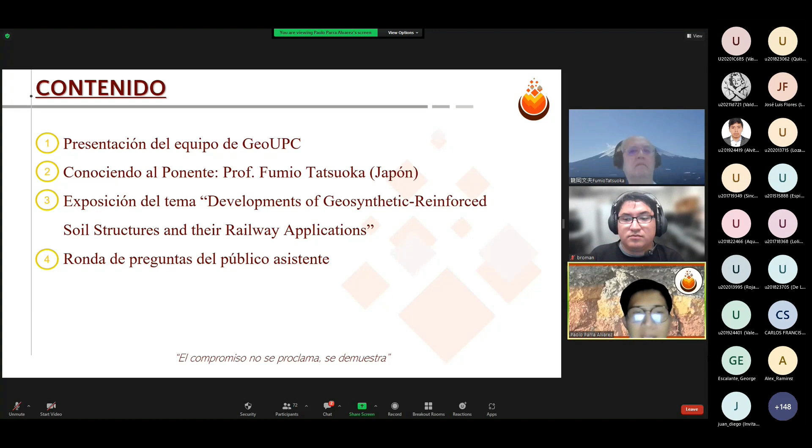Bueno, voy a presentarme un poco acerca de mi persona. Actualmente soy egresado y estoy trabajando para la empresa minera Cerro Verde como becario en el área de geotecnia en la gerencia de proyectos. En cuanto al equipo GeoUPC, somos un capítulo estudiantil conformado por alumnos de la carrera de Ingeniería Civil de la Universidad Ciencias Aplicadas, y tenemos como razón de ser nuestra formación como profesionales en el ámbito de la geotecnia.

Nosotros conformamos un espacio crítico de investigación donde participamos y creamos actividades para el aprendizaje de manera teórica a la práctica.

Bueno, voy a dar un poco acerca del profesor Fumio. El tema de hoy, como ya se le comentó, es acerca de la geotecnia sísmica, titulado Development of Geosynthetic-Reinforced Soil Structures and their Railway Applications. Es profesor emérito de la Ingeniería Geotécnica por el Departamento de Ingeniería Civil de la Universidad de Tokio, en Japón. Sus principales contribuciones en la investigación geotécnica incluyen la dinámica de suelos, ensayos en tensiones, deformaciones en laboratorio, el comportamiento de suelo-roca, la modelización constitutiva del suelo, los geosintéticos, las estructuras suelo reforzadas, numerosos artículos técnicos y monografías, entre los que se incluyen varios artículos sobre el estado de la técnica y sobre el tema clave.

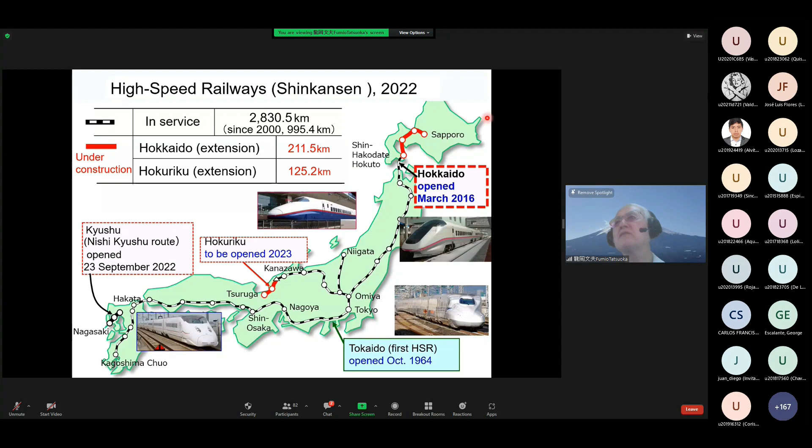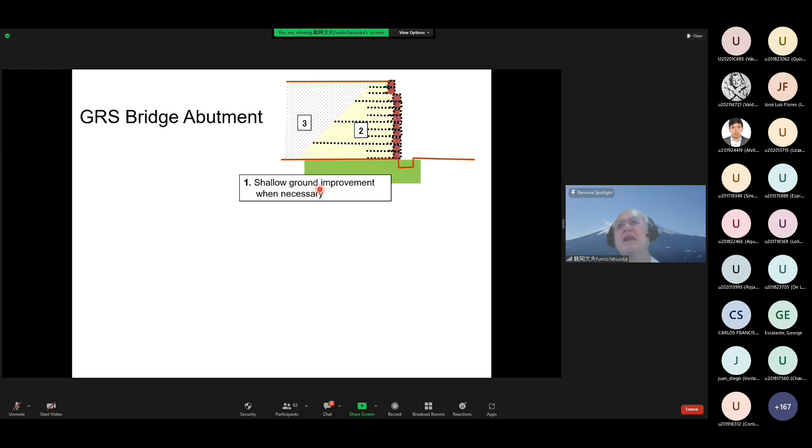First, shallow ground improvement when necessary, then construction of the GRS wall. So this is the view at this stage of the GRS bridge abutment, and then we construct the full height rigid facing, then the bridge bearings, then the girders.

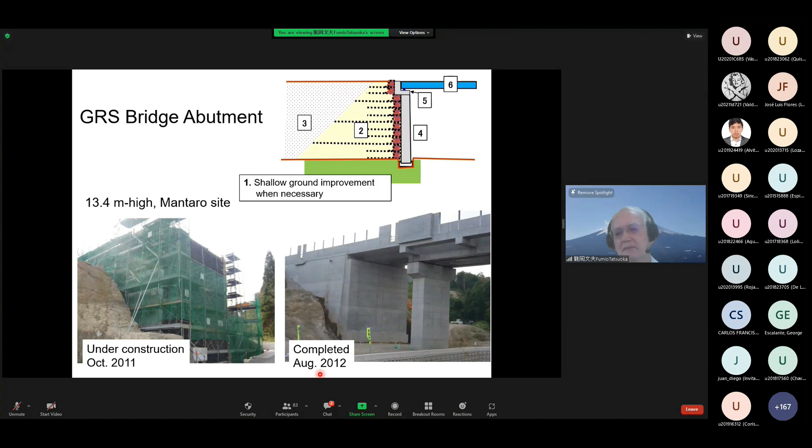Oh, this is the completed GRS bridge abutment. Here in Kyushu, this just opened. A number of GR structures were constructed. Among them, 78 GR bridge abutments were constructed.

This is the typical GR's retaining wall. Here, in this route of high-speed railway, 88 bridge abutments were constructed at the tunnel exit, like here and here. GR's bridge abutments were 78 - that is 87% of all the bridge abutments.

So this is how the GR's bridge abutment is constructed. One is bench cutting of stable natural slope. Second is construction of approach fill.

That is the geogrid-reinforced, well-compacted, lightly cement-mixed gravelly soil. The third is compaction of the backfill, at least 95% of max density at the optimal water content by modified Proctor. Fourth is arrangement of the geogrid layer.

Fifth is a completed approach fill. Sixth is a completed GR bridge abutment after construction of full height rigid facing.

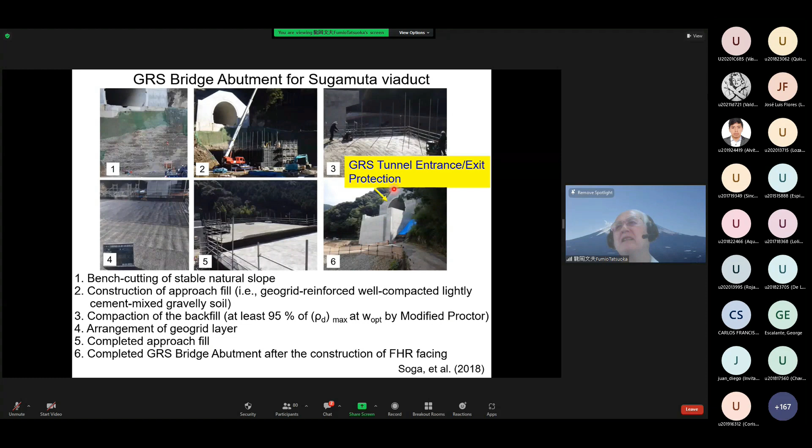Here is a GRS tunnel entrance exit protection. GR tunnel entrance exit protection has this structure, and this is the compaction of the backfill, then the arrangement of the geogrid layer, and this is the construction of GR's walls on both sides of the tunnel.

And this full height rigid facing is structurally separated from the RC tunnel lining. This is a typical GR tunnel entrance exit protection. Here you can see.

This is showing GRS integral bridge at the place called Genshu. So first, we excavate subsoil like this.

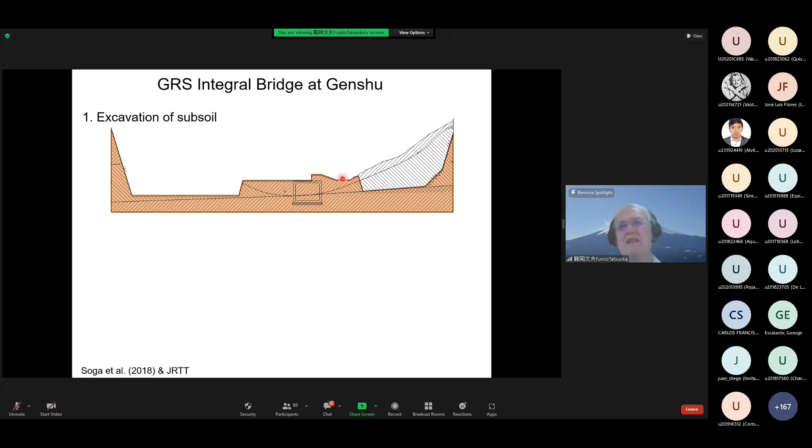Then construction of approach fills - this is the geogrid-reinforced, well-compacted, lightly cement-mixed gravelly soil.

Third is the construction of full height rigid facing after the deformation of the backfill and subsoil had taken place sufficiently. This is one of the key points of this technology.

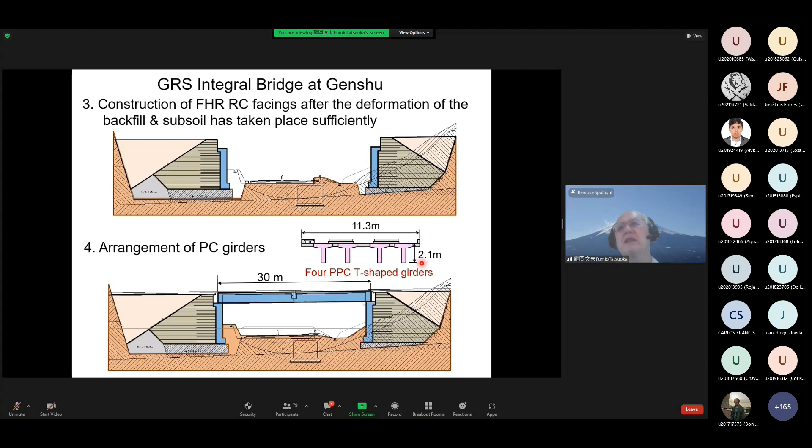Then fourth is the arrangement of PC girders like this. This is the cross-section of the girders. This is showing the placement and arrangement of a 30-meter long PC girder.

Then the structural integration of both ends of the girder to the full height facing, then construction of slab and others to complete the bridge like this.

This is a view taken in August this year. So here's a GRS bridge, integral bridge, and this is continuous RC slab tracks.

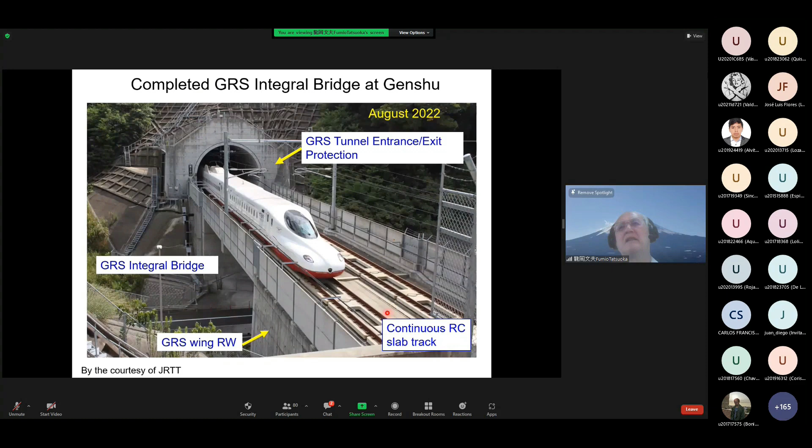So why are we using continuous RC slab tracks? The first thing is a relatively high initial construction cost, but a very large reduction of maintenance cost.

This continuous RC slab has not been constructed on conventional embankments and backfills retained by conventional type retaining walls, as it is difficult to ensure small settlement. On the other hand, construction of GRS structures has become standard practice, as small settlement with high stability can be ensured by good soil compaction, in addition to the use of synthetic reinforcement with small vertical spacing, 30 centimeters, firmly connected to the facing.

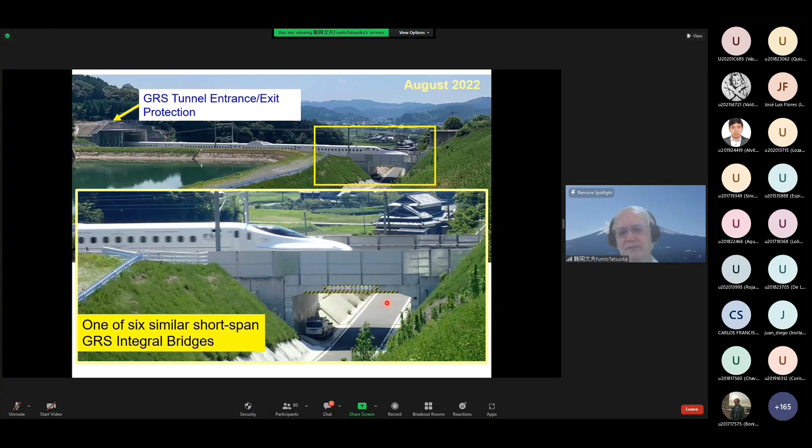So far, no problematic case during and after construction has been reported in all these projects. That is, no problematic case in all these projects.

The summary of the first part: a number of GRS structures with full height facing have been constructed in place of conventional type retaining walls, bridge abutments, and bridges. These GRS structures have become the standard railway soil structures in Japan.

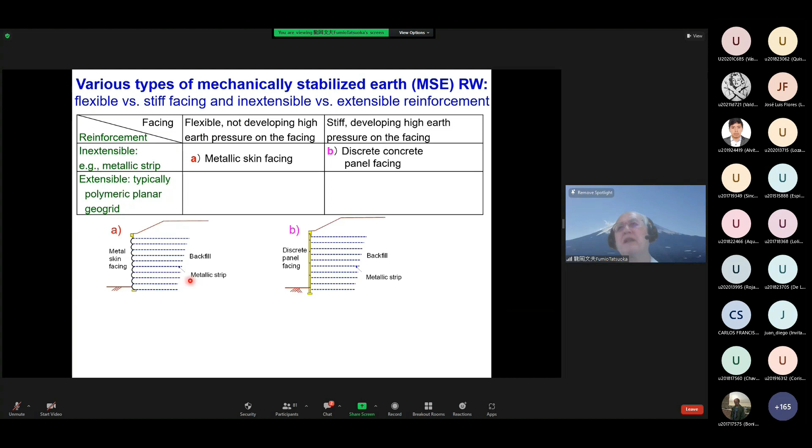So the combination of flexible facing and metallic strip is A. The combination of stiff facing and metallic strip is B. The combination of flexible facing and extensible reinforcement is C. And the combination of stiff facing and extensible reinforcement is D, modular block facing, and full height rigid facing, E.

Previously, many considered that facing is only to prevent the spilling out of backfill, and for small wall deformation and high wall stability, the earth pressure on the facing should be kept low. So flexible facing, for example A and C, is sufficient.

However, we have often observed that when using a flexible facing, for example A or C, the earth pressure is low, whereas the wall deformation is large, sometimes too large, indicating the paramount importance of using stiff facing.

So when the facing is flexible, we have a very low earth pressure on the facing. This results in low tensile forces in reinforcement, in particular at low level. This results in, in the active zone, low confining pressure, and therefore low strength and stiffness of the backfill. So we have large wall deformation and low stability of the wall.

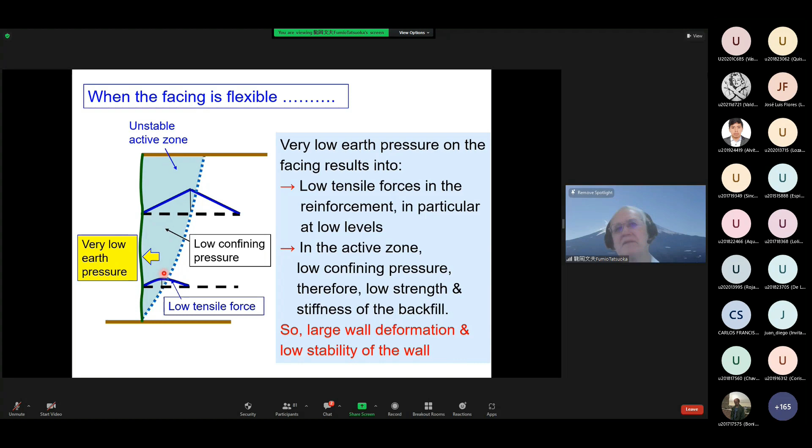On the other hand, we have consistently observed that stiff facing firmly connected to the reinforcement layers, for example B, D, E here, develops large earth pressure, which results in small wall deformation and high wall stability.

So when the stiff facing is firmly connected to the reinforcement, then we have high earth pressure on the facing. This results in high tensile forces in the reinforcement, even at low levels. Then in the active zone, high confinement pressure, and therefore we have high strength and stiffness of the backfill. So small wall deformation and high stability of the wall we can obtain.

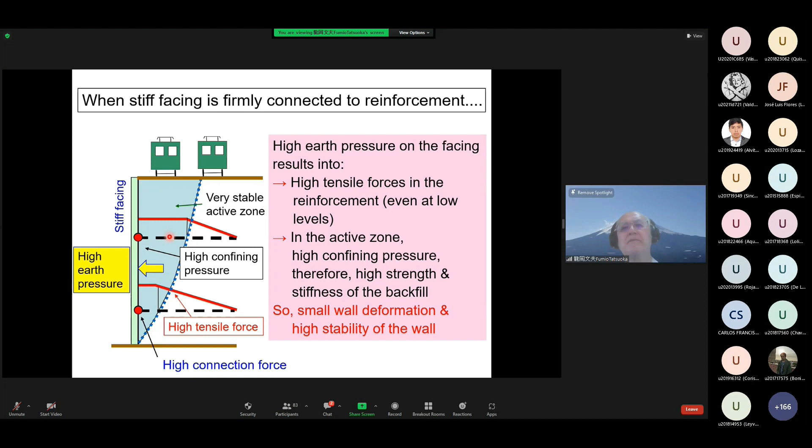This is a Terre Armée retaining wall having a discrete panel facing and metallic strip reinforcement.

So this is showing a high connection force here and here. This is showing a high earth pressure on the facing and high tensile forces in reinforcement. So this results in a stable wall behavior with small wall deformation.

Facing of discrete panel or modular blocks, B or D, can effectively decrease the wall deformation and increase wall stability. However, for high wall stability, E, full height rigid facing, is more effective and its use is very advantageous in many aspects. This I am going to explain in the following.

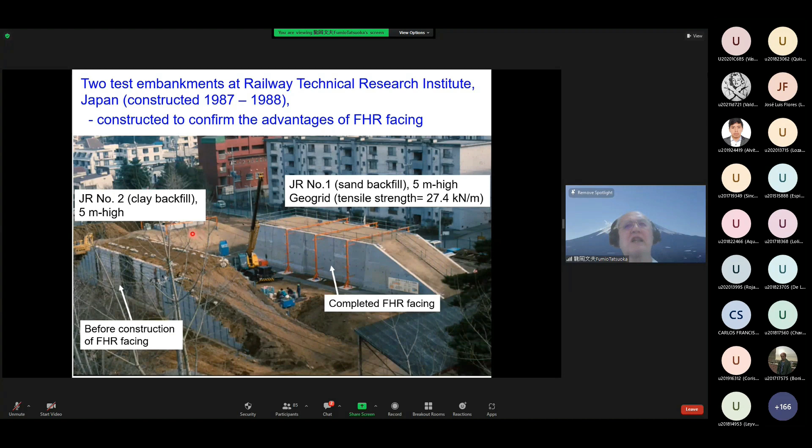This is the two test embankments at Railway Technical Research Institute, constructed in 1987 to 1988, to confirm the advantages of full height rigid facing. Here is before construction of full height rigid facing, and this is completed. Number one test embankment is 5 meters, and geogrid was used. Number two is a clay backfill.

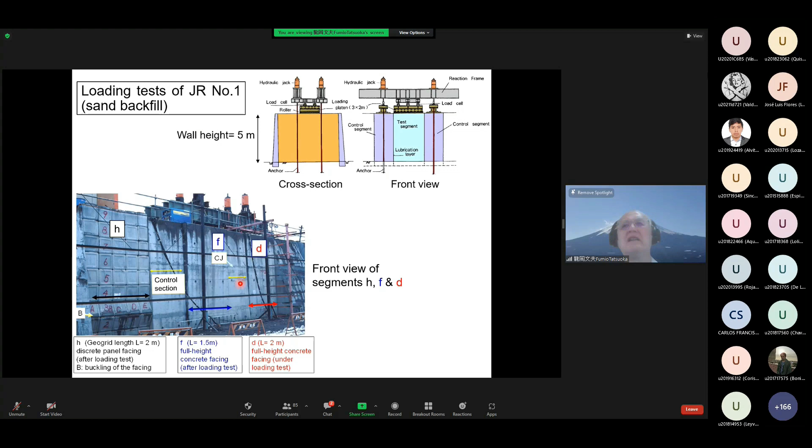Segment F here is full height rigid facing, but the length was 1.5 meters. This was more stable than segment H due to the use of full height rigid facing, despite the use of the short geogrid, only 1.5 meters.

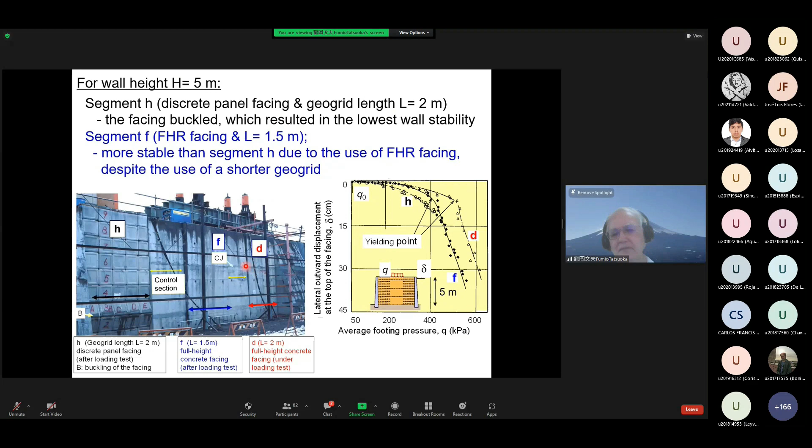Segment D, full height rigid facing, the length of the grid was now 2 meters. This shows much more stable behavior, much more stable than segment H. This was due to the use of full height rigid facing.

However, stability of segment F and D was restrained by yielding of the construction joint CJ in the concrete facing. In this test embankment, facing was not steel reinforced, so at the yielding point, cracking in the construction joint meant the strength did not increase sharply after this point. So all the full height rigid facing of the prototype GRS retaining walls that have been constructed subsequently are all lightly steel reinforced.

The summary of the discussion of facing and reinforcement: full height rigid facing, firmly connected to the reinforcement layers, can ensure small deformation and high stability of the wall, even when relatively short so-called extensive reinforcement is used. Besides, full-height rigid facing exhibits good durability and aesthetics. These features are discussed in the next section.

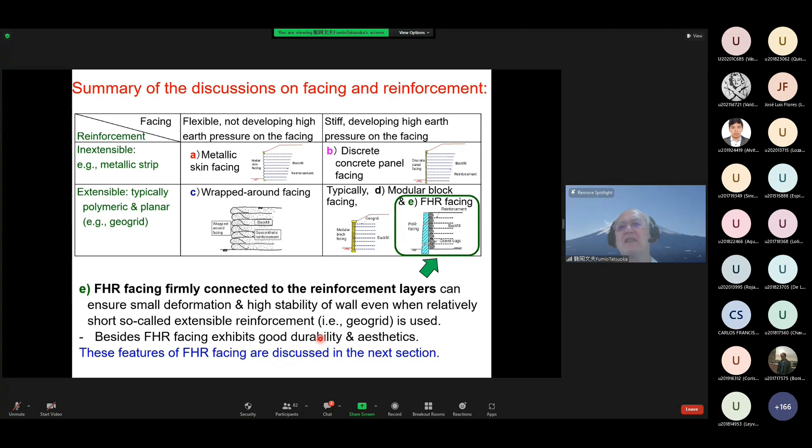The next topic is the multiple function of full-height rigid facing. First of all, conventional retaining wall is a cantilever structure. Therefore, we have large forces in the facing, requiring a massive and strong facing, and a large overturning moment and lateral thrust force at the facing base. This results in large stress concentration at the facing base and unstable behavior, particularly under severe seismic loads, so usually we use a pile foundation.

This is showing a collapse of a gravity wall, one type of cantilever retaining wall, during the 1995 Kobe earthquake. We can see complete overturning failure despite a seismic design having been made. So this conventional old seismic design is not sufficient.

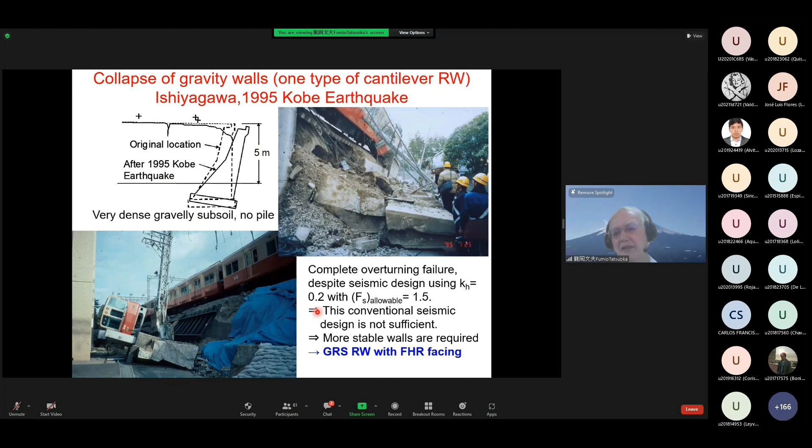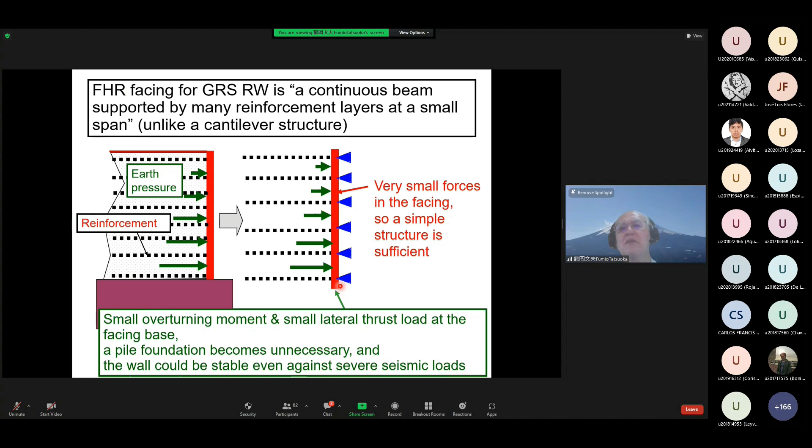So, full height rigid facing for GRS retaining wall is a continuous beam supported by many reinforcement layers at a small span, 30 centimeters. This is unlike cantilever structures. So, small overturning moment and small lateral thrust load at the facing base result. Then we don't need a pile foundation, and the wall could be stable even against severe seismic loads.

This is showing a GRS retaining wall immediately after completion, 1992. This is GRS retaining wall with full height facing at the Tanata.

I took this picture a week after the 1995 Kobe earthquake. You can see a full collapse of a Japanese wooden house in front of the GRS retaining wall. The wall survived.

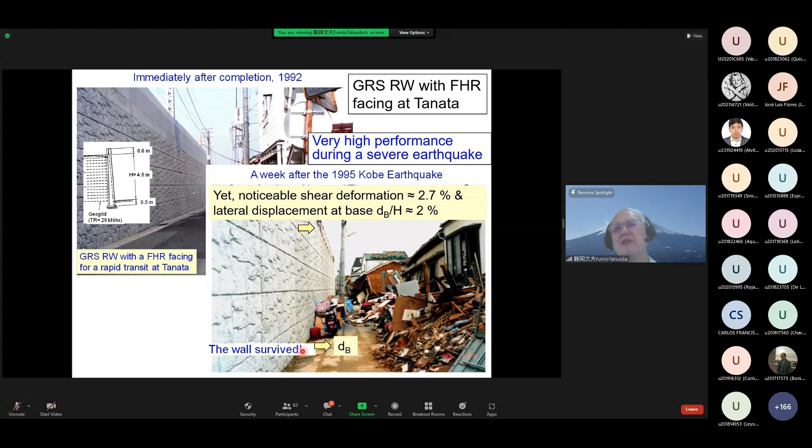Yet, noticeable shear deformation, 2.7%, and noticeable lateral displacement at the base, dB by H 2%, were observed. This is due likely to the use of short reinforcement grid.

Here, this is only 2 meters, 40% of the wall height, H equal to 5 meters. This short grid was an exceptional case of the grid arrangement. Then the question is, what is the necessary and sufficient grid length for wall stability?

So we performed a shaking table test simulating retaining walls during the 1995 earthquake. This is a cantilever gravity-type retaining wall, the model for gravity-type retaining wall. This is a model for GRS retaining wall.

The reinforcement is very short, and these reinforcements are very short, L by H equal 0.4. This was adopted as an exceptional case to avoid interaction with the existing railway track on the crest of the embankment. So this was seismically designed by the old code using a low KH of 0.2 for allowable safety factor of 1.5.

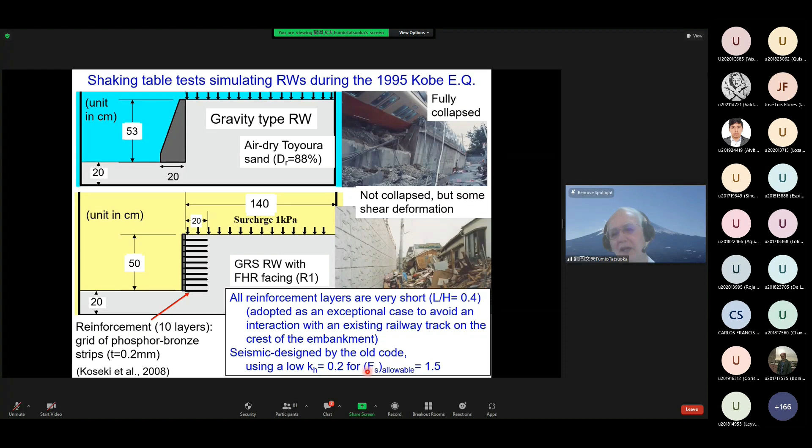This is showing the result of the shaking table test. This is wall displacement at the top, and this is seismic coefficient K equal to maximum acceleration divided by G. This seismic load was applied stepwise, increasing the alpha max, maximum acceleration. So with a gravity type wall, we have this displacement.

And on the other hand, the GRS wall was more stable than the gravity wall, but showed noticeable shear deformation. So this behavior of the two model walls is consistent with the behaviors of the two prototype walls.

This is showing the behavior of two other types of conventional retaining wall, cantilever wall and leaning type. All three types of conventional retaining wall exhibited similar behavior.

On the other hand, R1 shows a better performance, and R2, having two long reinforcement layers, exhibited better performance. For R3, all the reinforcement has a length of L by H equals 0.7. The behavior is better.

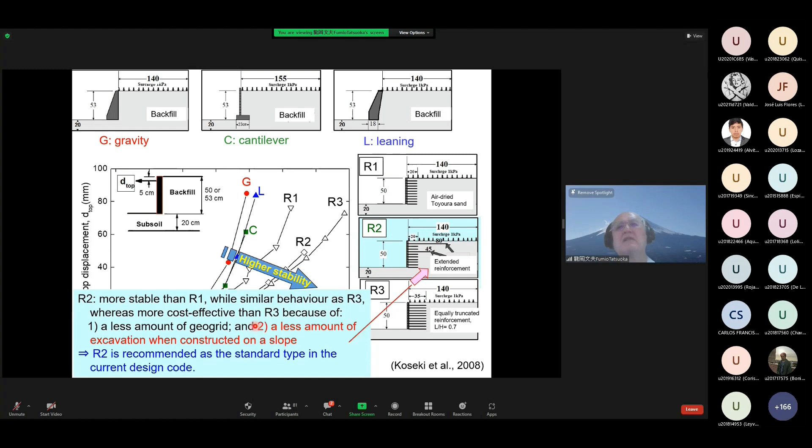At many places in urban areas, we have a strong need for the restructuring of a gentle slope to a vertical wall. However, construction of a retaining wall on the slope may require large slope excavation and use of temporary anchored sheet piles.

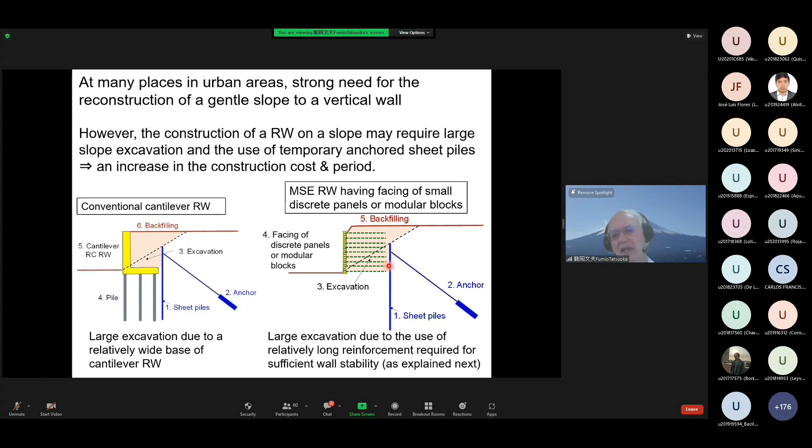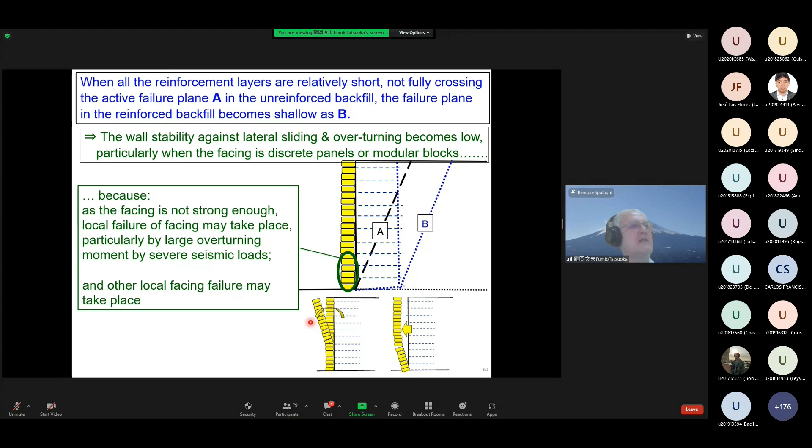So when the facing is discrete panel or modular blocks, to ensure sufficient stability, relatively long reinforcement, usually L by H more than 0.7, is used to fully cross the active failure plane A and to develop a deep failure plane C like this in the reinforced backfill.

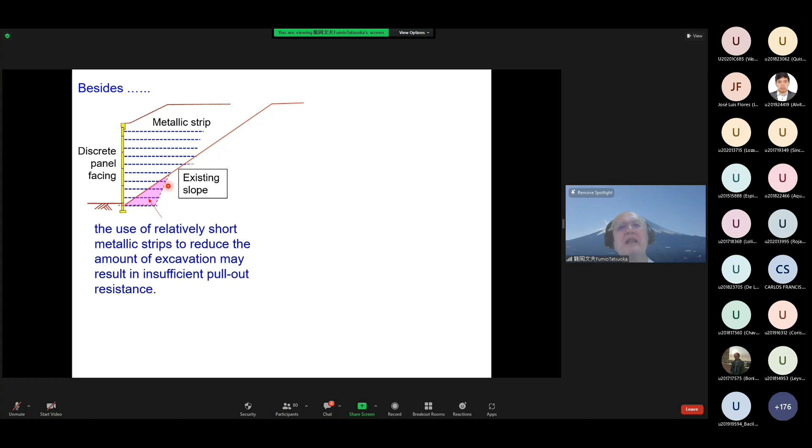Then large slope excavation becomes necessary, and the use of anchored sheet piles may be required. Besides, the use of relatively short metallic strips to reduce the amount of excavation here may result in insufficient pullout resistance. So the use of relatively long metallic strips to prevent pullout failure results in an increase in slope excavation and the use of anchored sheet piles. This is an increase in the construction cost and period.

Compared with two cases having a large slope excavation here and here, now GRS retaining wall with full facing having a short base, these reinforcement layers - so this is our design.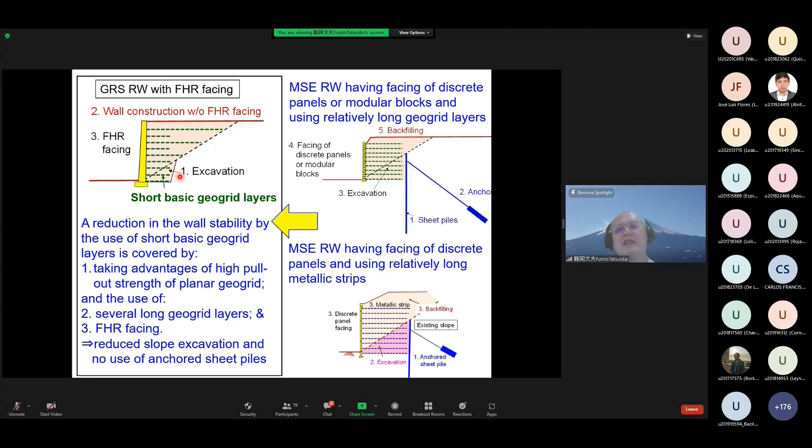So a reduction in wall stability by the use of short basic grid layers is covered by first taking advantage of high pullout strength of planar grid and the use of several long grid layers like this, and the use of rigid facing. Then we have reduced slope excavation and no use of anchored sheet piles. This is a typical case - in Tokyo, you can see excavation here is very small.

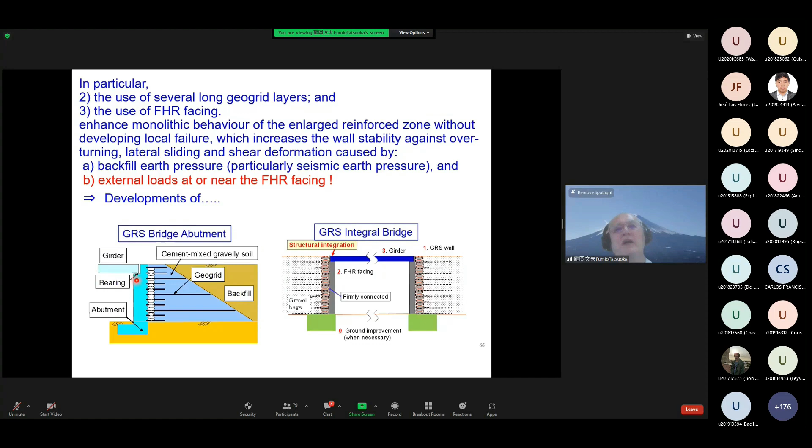And the stability against external loads like this, which may be applied at or near the full-height facing. Then this results in the development of GRS bridge abutment and GRS integral bridge. In these cases, the girder is supported by full-height rigid facing. I'll explain this later.

Another important point is that conventional retaining walls and RC viaducts - this disadvantage is costly, but they have an advantage that is limited occupied space and the ability to support other structures.

In comparison, GRS retaining walls with facing of modular blocks or discrete panels - this is less costly, but unlike conventional retaining walls and RC viaducts, we need a buffer zone here to ensure safe operation of road and railway. So we need a wider occupied space, and then facing cannot effectively support other structures.

In comparison, GRS retaining wall with full rigid facing - this is less costly, and like conventional retaining wall and RC viaduct, railway and road can be located very close to the wall face, so smaller occupied space. And full-height rigid facing can support other structures.

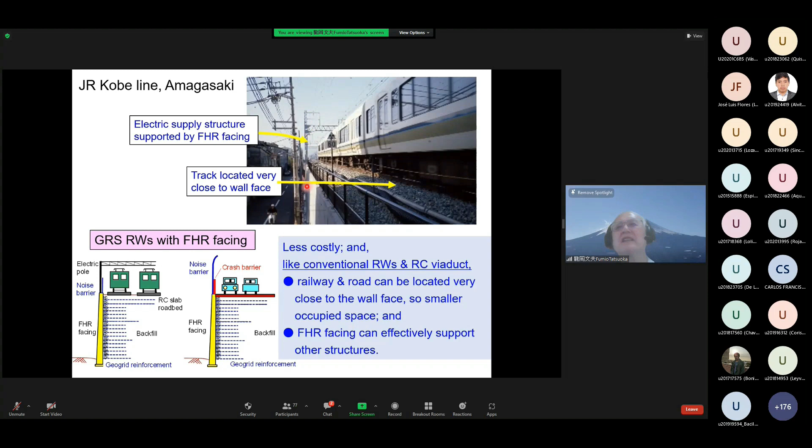This is a typical case. You see this structure is supported by full-height rigid facing. And you see here, railway track is located very close to the wall face.

The summary of the multiple function of full-height rigid facing is, first, facing is an important and essential structural component that confines the backfill, develops large tensile force in the reinforcement, and can support other structures. So during service, facing should be stiff enough.

On the other hand, during the construction of the reinforced backfill, the facing should be deformable enough to accommodate the deformation of the backfill and subsoil. So this contradiction can be resolved by staged construction: deformable facing during construction of the backfill, and we have settlement, and then finally full-height rigid facing.

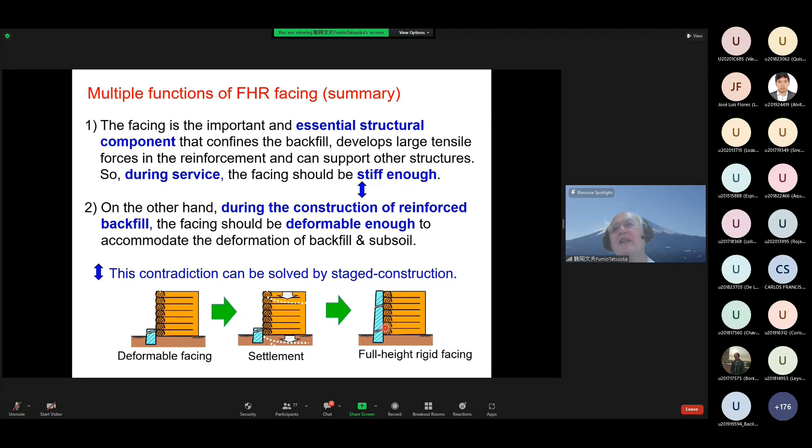The next topic is the advantage of constructing the full-height rigid facing after the reinforced backfill. This is the typical staged construction. This is before the start of construction. This is the stage of completed backfill, but before the construction of full-height rigid facing. This is a completed wall after the construction of full-height rigid facing.

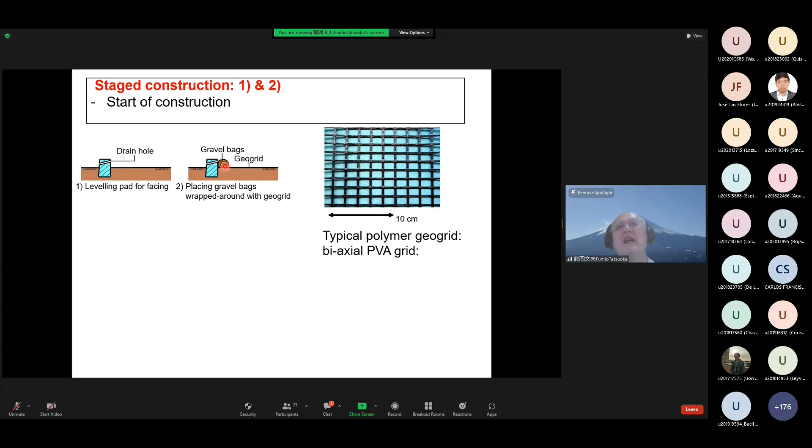This is showing the step-by-step construction. So first, 1 and 2, start of construction like this. So placing gravel bags at the shoulder here, then the backfilling and compaction like this, and second layer and third layer.

The good compaction of the backfill is achieved by small lift, 15 centimeters, ensured by a small vertical spacing, 30 centimeters, between the grid layers, and no rigid facing existing during backfill compaction. This is the completion of the wrapped-around wall without full-height facing, like this.

After the sufficient compression of backfill and subsoil settlement, a full height rigid facing is constructed by casting fresh concrete directly on the grid wrapped around the wall face. This is an external concrete form, but there is no internal concrete form. The fresh concrete is directly cast in place on this wrapped around wall face.

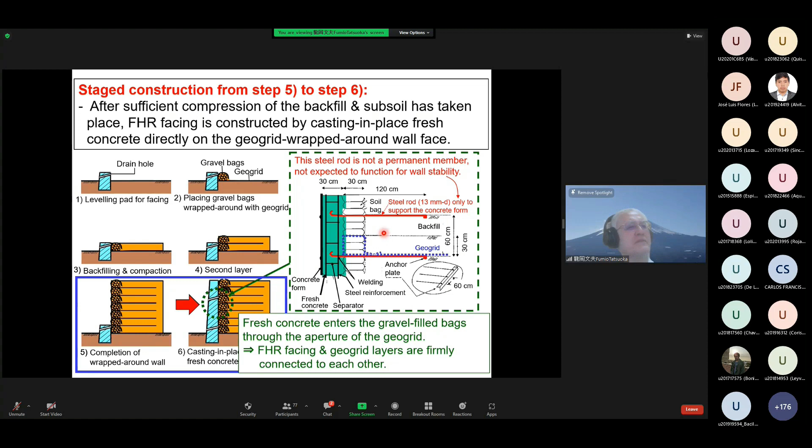The properties required for the grid are: first, sufficient strength and stiffness with low creep deformation; second, high anchorage strength in concrete and backfill; third, good adhesiveness with concrete; and fourth, high long-term resistance against the high pH of concrete. One typical biaxial PVA grid satisfies all four requirements.

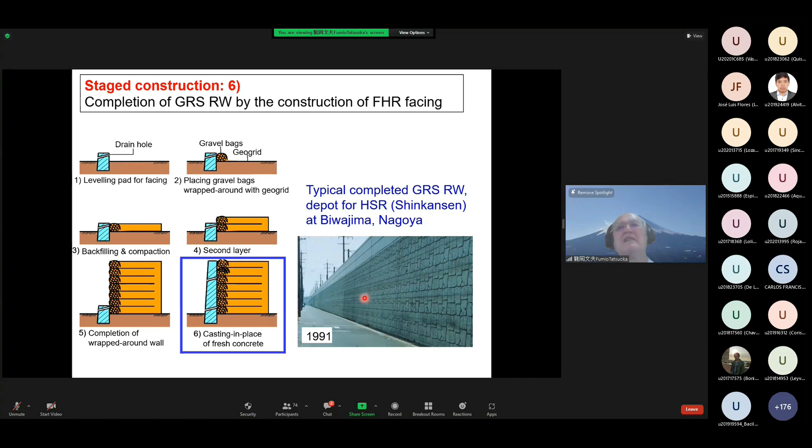This is the completion of the GRS wall by construction of the full height facing. This is the cross section of the wall.

The advantages of stage construction from step 5 to 6: first, very small residual deformation, as no differential settlement takes place between the full height rigid facing and the backfill. Second, gravel bags here protect the facing and the grid connection.

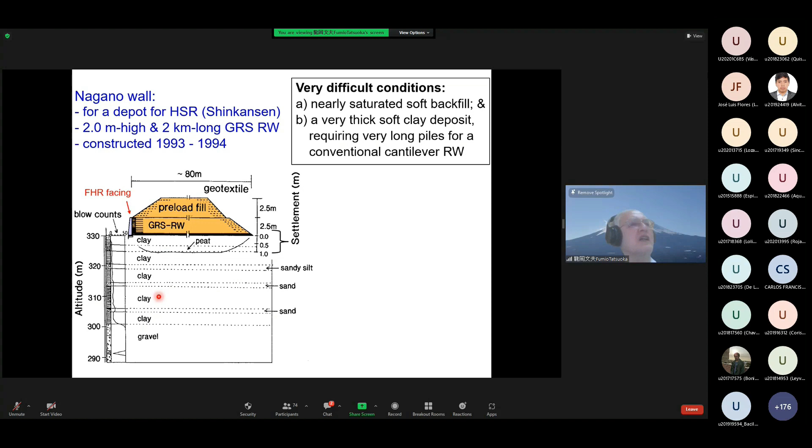This is a typical case showing that. We had very difficult conditions for this wall: nearly saturated soft backfill was used, and a very thick soft clay deposit, 30 meters thick, requiring very long piles if we constructed a conventional cantilever retaining wall.

These problems were overcome by stage construction: first, a GRS retaining wall without full height rigid facing and preloading fill, allowing settlement of about 1 meter, then removal of the preload, then final construction of the full height rigid facing.

This is the preload fill. Wall height before preloading was 3 meters. This became 2 meters after preloading. Then construction of the full height rigid facing took place after removal of the preload fill. This is the view 20 years after construction.

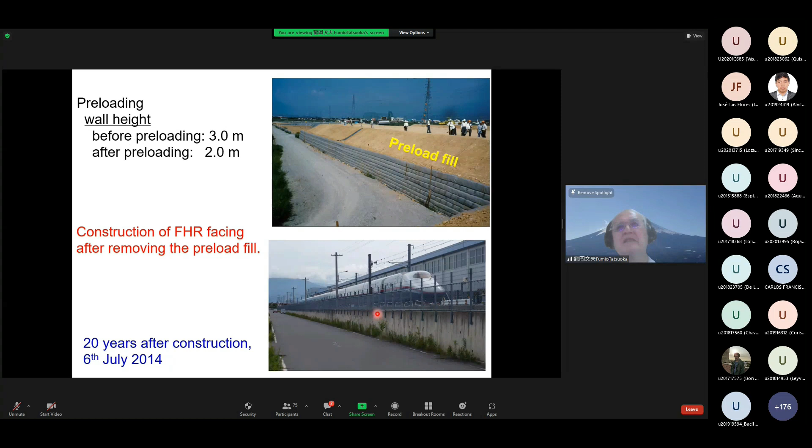We had several serious problems with a box culvert crossing a road or railway embankment on soft soil when constructed by the conventional method. By the conventional method: first piles, then the box culvert, then the embankment, then problems start. We have settlement of the backfill.

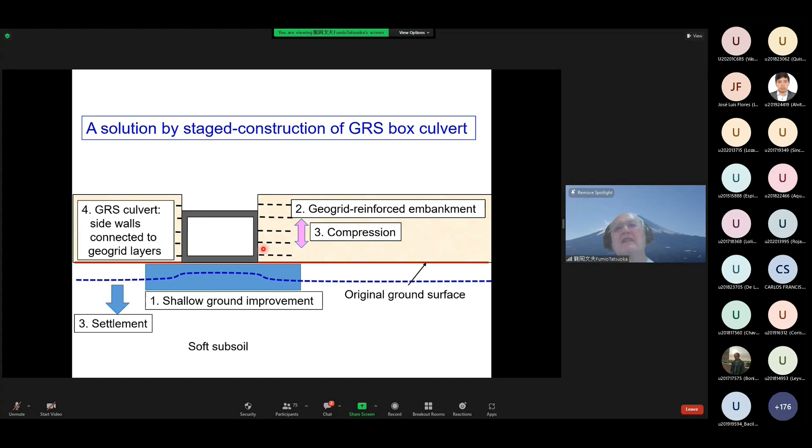Summary of the advantage of stage construction: first, during construction of the geo-grid reinforced backfill, the facing is deformable enough to accommodate the deformation of backfill and subsoil. Second, during long-term service, even when subjected to severe earthquakes, the stiff and strong rigid facing can keep wall deformation small, ensuring high wall stability.

The next topic is about GRS bridge abutments and GRS integral bridges. This shows the development from GRS retaining wall to GRS bridge abutment to GRS bridge structure.

First, this is a conventional simple girder bridge. These have several serious problems, and to solve these problems, other new structures have been constructed.

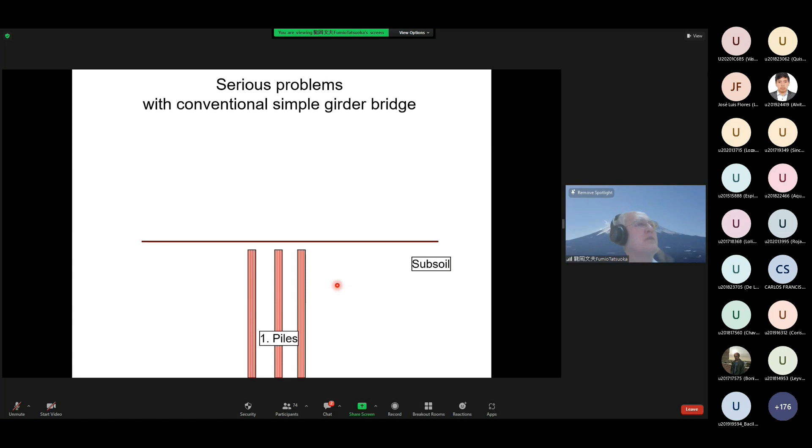First is the problem of conventional simple girder bridges: we construct piles, then the RC abutment, then the backfill is constructed, then problems start. By earth pressure, the RC retaining wall abutment may displace, and settlement and lateral flow of the subsoil by the weight of the massive backfill results in negative friction and bending of the piles, and an increase in the length and number of piles.

Then we install bearings, fixed or movable. This is costly for construction and long-term maintenance, and we have long-term settlement.

And the problem of seismic stability of the bridge abutment. This is the collapse of the wing wall and approach fill of the bridge abutment during the 1995 Kobe earthquake. Then we have seismic earth pressure, subsoil settlement and lateral flow by seismic load, low seismic stability at the movable bearing, and settlement by seismic load. So what is the solution?

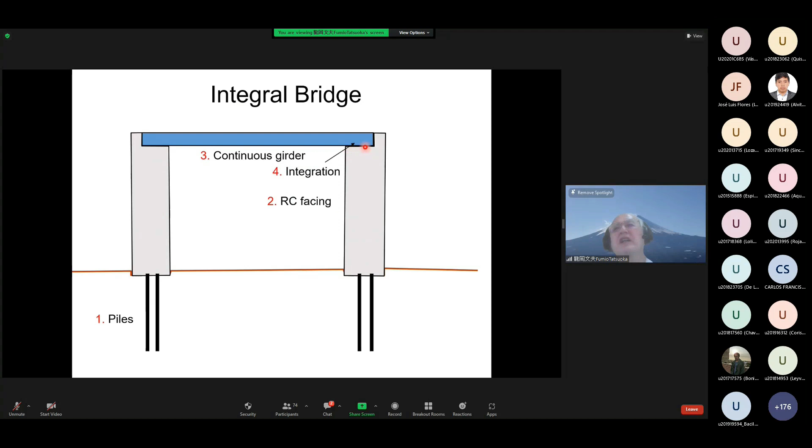Then some problems. Many were constructed in the United Kingdom and United States because of low cost for construction and maintenance, due to no use of girder bearings and use of continuous girder. However, we have several unsolved old problems. First is the earth pressure and displacement here, and negative friction and bending of the piles by long-term and seismic ground movement, and gradual settlement and sudden large settlement by seismic load. These are old problems.

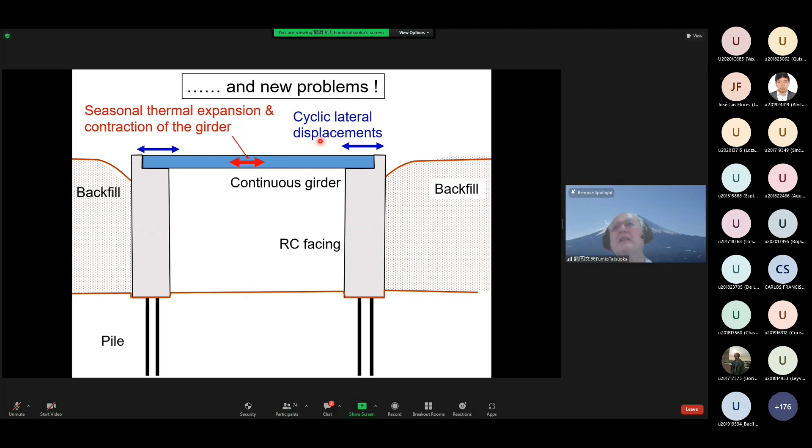In addition, we have new problems. First, we have seasonal thermal expansion and contraction of the girder. Then we have cyclic lateral displacement at the top of the facing, because this part is structurally integrated. Then we have settlement and also increase in earth pressure. This is due to the ratchet mechanism.

Ratchet mechanism: when we have active movement of the facing, we have formation of an active wedge, then we have settlement in the backfill. Then we have passive movement of the facing. The active wedge deforms and displaces as part of the passive wedge, not recovering the settlement during active movement. So this is the development of the passive wedge.

This results in an increase in the facing earth pressure. Then this is a second active displacement. This results in the reactivation of the active wedge. So we have additional settlement in the backfill, with no development of passive wedge at this stage.

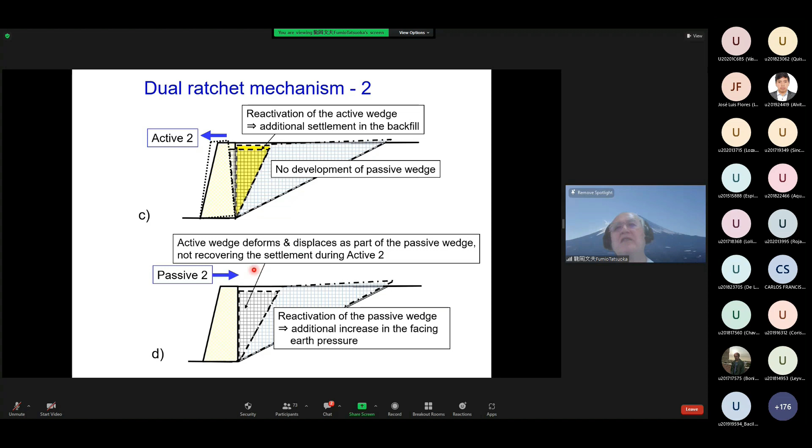During the second passive displacement, the active wedge deforms and displaces as part of the passive wedge, not recovering the settlement during active 2. Then we have reactivation of the passive wedge, resulting in an additional increase in the facing earth pressure.

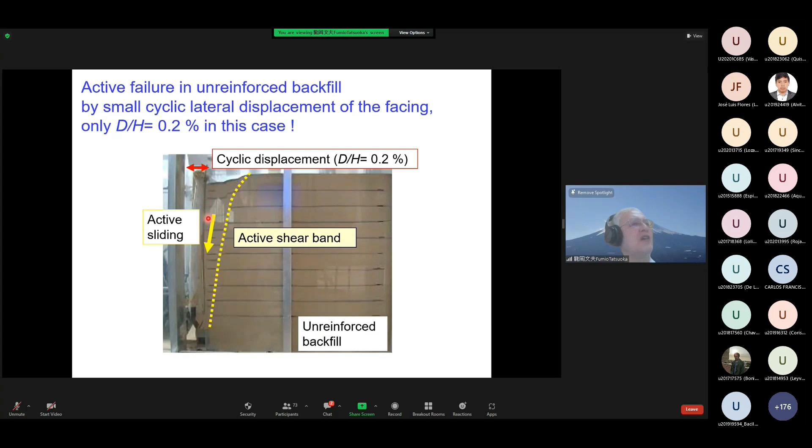So another solution is a geosynthetic-reinforced bridge abutment, GRS bridge abutment, generation 1 and generation 2.

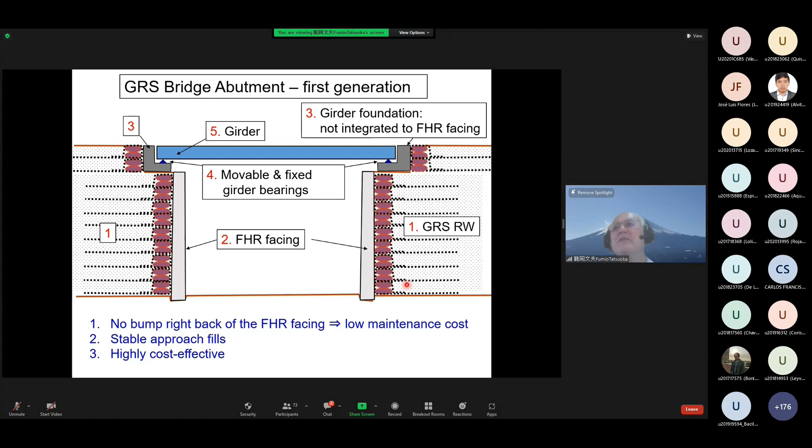GRS bridge abutment, first generation. First we construct the GRS retaining wall with full height facing, and the girder foundation is placed here, not integrated to the full height facing. Then movable and fixed girder bearings and girders. So we had no bump behind the full height facing, resulting in low maintenance cost. This is stable - we have a stable approach fill and it is highly cost effective.

However, when the girder becomes long and heavy, first the girder foundation, where the fixed bearing is arranged, may become unstable due to large seismic inertial load of the girder. And settlement of the girder foundation due to compression of the underlying backfill may become unacceptable.

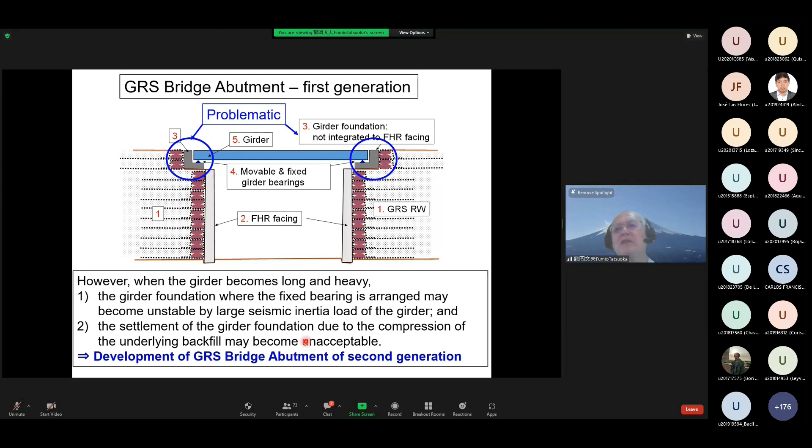So then we moved to the development of the GRS bridge abutment of second generation. The second generation is constructed in this way: first the GRS wall with full height facing, then the girder foundation is placed here. This is made stable by integration to the full height facing. Then bearing and simple girder.

This is much more stable and much more cost-effective than the conventional type of bridge abutment. Besides, this GRS abutment of the second generation is statically determinate by the use of bearings. So the internal forces in the girder and facing are not sensitive to thermal deformation and displacement of the facing, if they take place. So the design of the girder and full height facing is not sophisticated.

For railways in Japan, to minimize the deformation of the reinforced zone, particularly for continuous RC slab tracks, and to ensure high stability against severe seismic loads, this is lightly cement-mixed well-graded gravel soil, well compacted and reinforced with grid layers firmly connected to the full-height rigid facing. The grid should have very high long-term resistance against high pH of concrete. Typically, we use PVA.

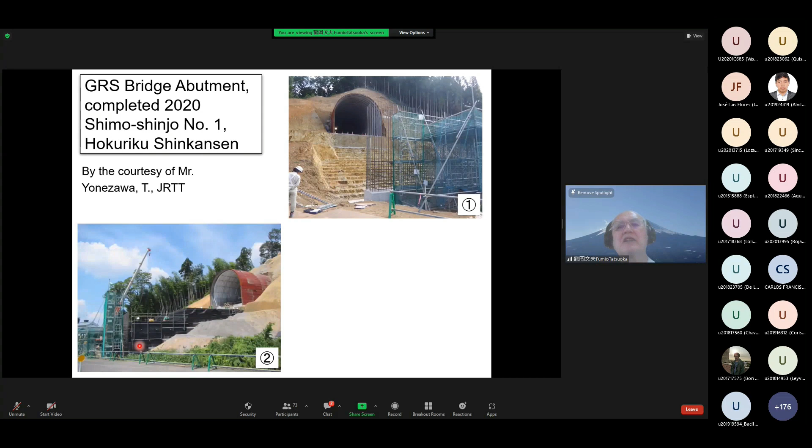This is a typical GRS bridge abutment of the second generation. This is the start of construction.

Construction of the approach fill and the construction of the full-height rigid facing, and this is the completed one. Summary of the GRS bridge abutment second generation: the first one was constructed in 2003, and this is the highest one. So the first one at Tanaka in 2003, and by 2022, in total 185 have been constructed, including 41 for Hokkaido High-Speed Railway, 79 for Kyushu High-Speed Railway, and 49 for Hokuriku High-Speed Railway.

So, bridge placing both ends of a simple girder on the bearings at the crest of the full-height rigid facing of a pair of GRS abutments, second generation. This has much better performance and much higher cost effectiveness than the conventional simple girder bridge, so it is relevant in many cases.

However, the following two problems remain: first is the high cost for construction and maintenance of the bearings, and the low seismic stability of the girder at the movable bearing.

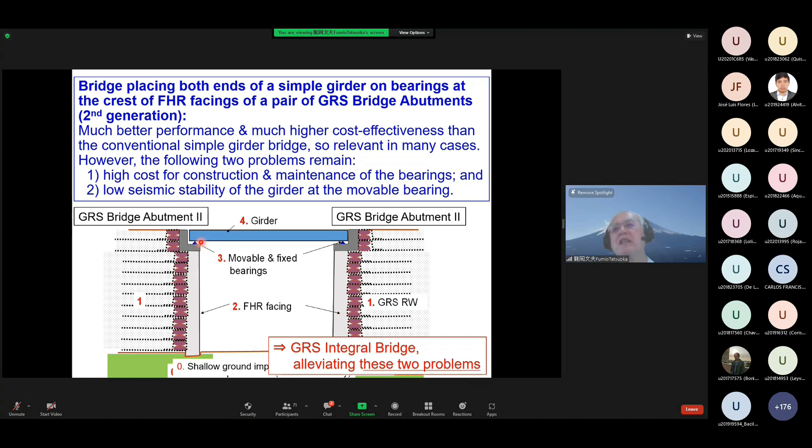So we went to the development of GRS integral bridge. This is a combination of two technologies: GRS bridge abutment and integral bridge.

This is constructed in this way: first is shallow ground improvement when necessary, and construction of the GRS wall, then full-height facing, then this continuous girder and structure integration.

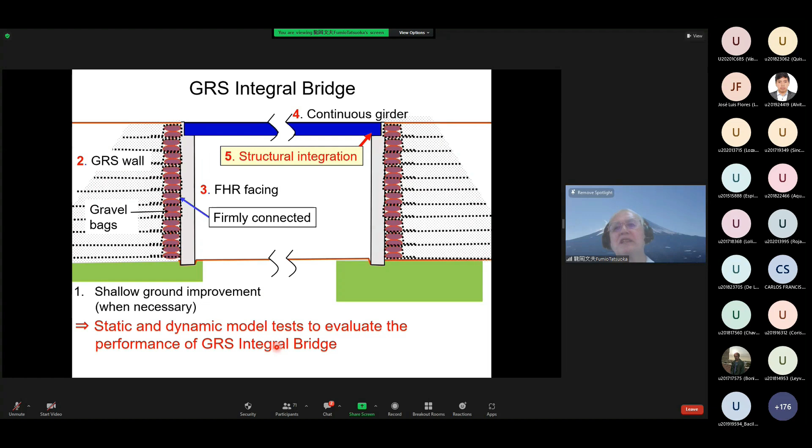So this bridge is used to confirm the performance of this type of bridge. We performed static and dynamic model tests to evaluate the performance of the GRS integral bridge. First is the static cyclic loading test.

We also performed a shaking table test. This is the model of the GRS integral bridge. Here the length of the model girder is 61 cm, and by using mass here, the equivalent length of the girder was made to be 2 meters.

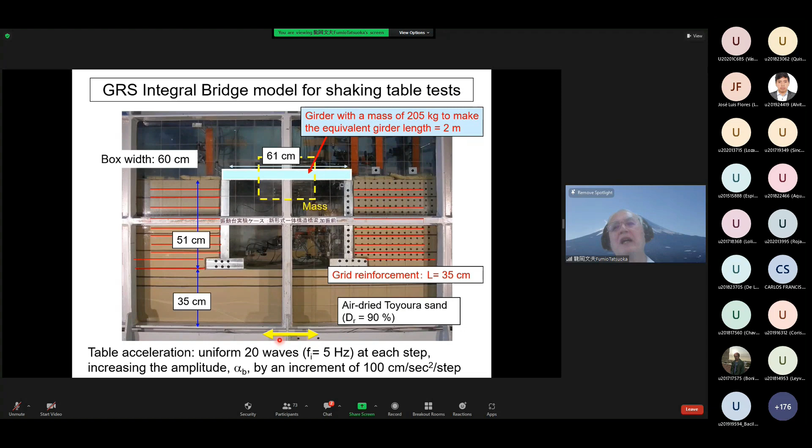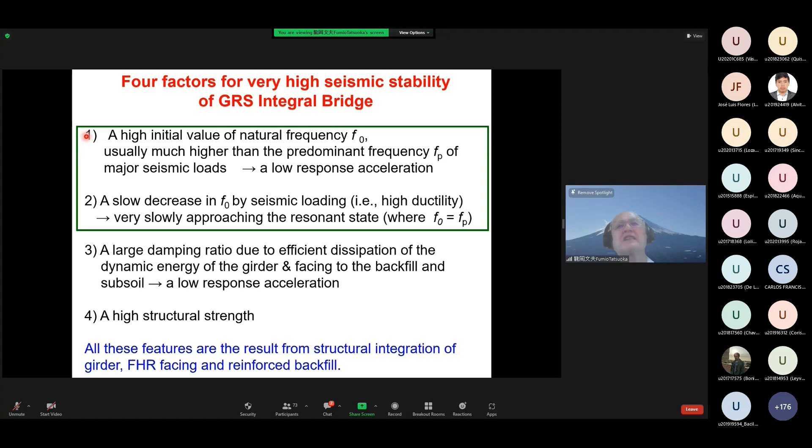This is completed 2012 for Hokkaido high-speed railway. You can see slender girder and slender full height rigid facing. This is the result of a structural integration of girder, full height rigid facing, and reinforced backfill. No bump is developing right behind the facing, which results in large cost reduction in construction and maintenance.

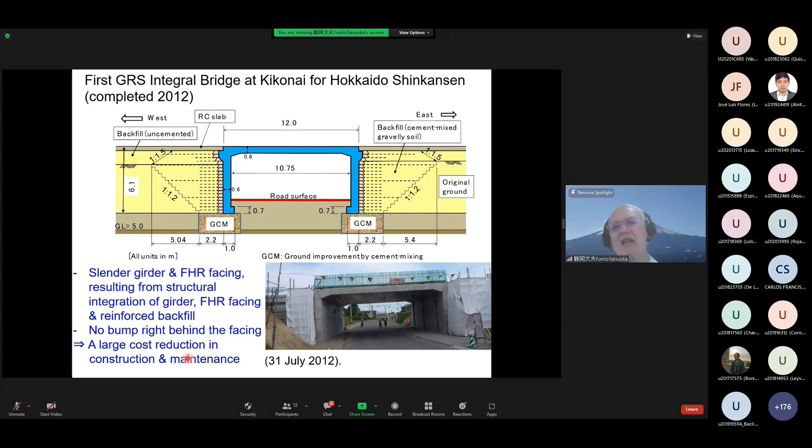We compared construction cost, seismic stability, anti-tsunami stability, and need for maintenance. In all these factors, the GRS integral bridge was the best among the 3 candidates, so this was adopted.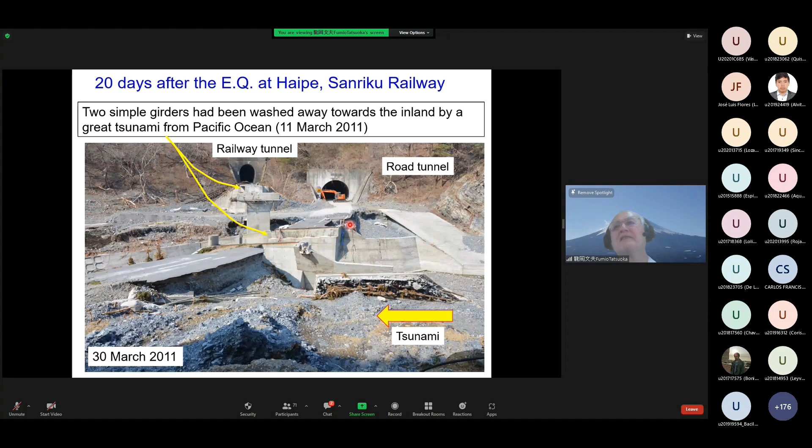This is the view of another place where the simple girder bridge was totally collapsed by tsunami from the sea. This is the completed one, and the total span was 60 meters.

This is the GRS abutment before construction of the full height rigid facing. This is during construction. The bridge abutment here without full height rigid facing has been completed, and this is the completed one. You can see slender girder and slender full height rigid facing, and no bump here.

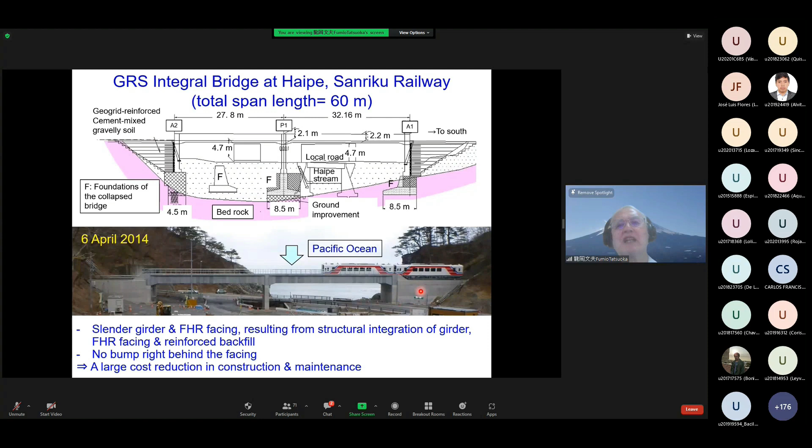This results in a large cost reduction in construction and maintenance. So this is two GRS integral bridges here. In this case, integral bridges are GRS bridge abutments constructed together like this. This is a GRS bridge abutment, and this is a GRS integral bridge.

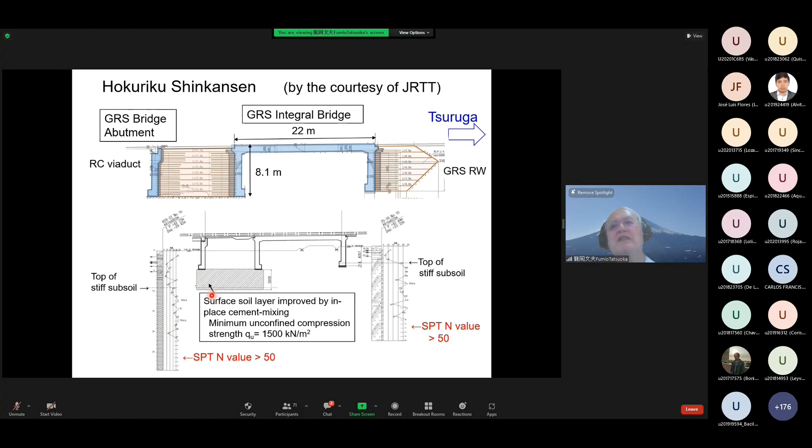In this case, some ground improvement of the relatively weak surface soil layer was needed. So this shows the different patterns of the grid arrangement. For the GRS wall, the longer the grid used, the higher the placement.

We use short basic grid layers to minimize the excavation when constructing on the slope. Several long grid layers are at the upper levels for high wall stability and high stability of the surface soil layers subject to large traffic load.

We may have different settlement in the reinforced layer and unreinforced layer, but this difference has no serious effect on the operation of railway and road, because the road and railway run in parallel to the facing.

In comparison, for the GRS bridge abutment, longer grid layers are used at the bottom. This is for a low gravity center of the reinforced zone, to achieve high stability against overturning about the facing base. This also avoids cracking in the brittle cement-mixed backfill, which would take place if constructed over relatively deformable unreinforced backfill.

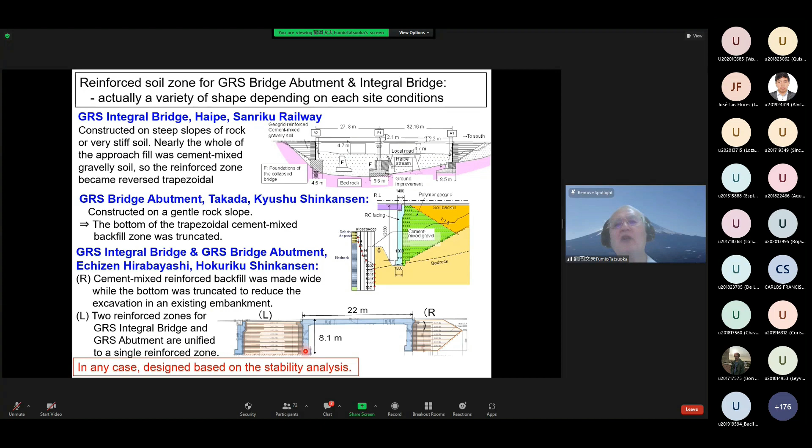In this case, it's a rock slope, so the bottom part is truncated. In this case, it's an approach fill for the GRS bridge abutment, and the GRS bridge abutment and GRS integral bridge are constructed together. In any case, the design is based on stability analysis.

A summary of this part: GRS bridge abutment places one end of the simple girder on a fixed bearing arranged at the crest of the full height rigid facing over the GRS retaining wall. GRS integral bridge structurally integrates both ends of a continuous girder to the crest of the full height rigid facing of a pair of GRS retaining walls, without using bearings.

Compared with conventional simple girder bridges, these structures are much more cost-effective, exhibiting no bump right behind the facing, while having much higher stability against severe seismic loads, strong floods, and tsunami during a long period of service. They are now the standard bridge structures for railways, including high-speed railways, Shinkansen.

The last topic is the restoration of soil structures that collapsed by earthquakes, floods, and tsunami. This case collapsed during the 1995 Kobe earthquake. You can see a full collapse of a conventional type retaining wall. This was restored to a GRS retaining wall and nail walls.

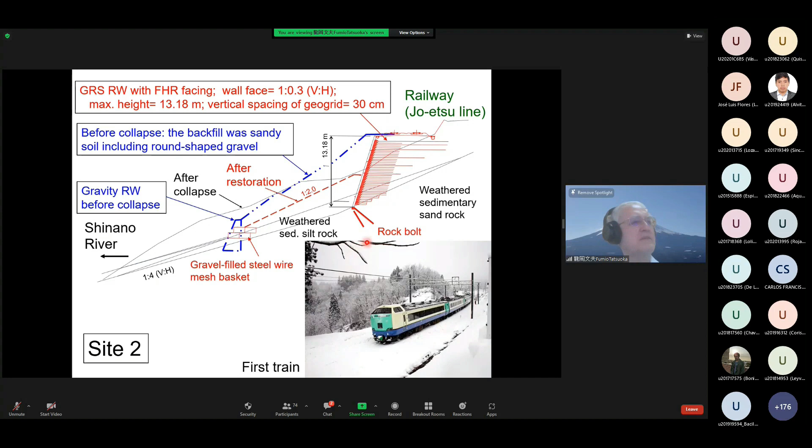This is showing construction of full height facing. This is another site. You can see railway embankment collapsed, and this was reconstructed to a GRS retaining wall.

This is the collapse of many railways by the great tsunami during the 2011 Great East Japan earthquake. This is a station before the earthquake. You can see a viaduct, RC viaduct here. This was collapsed by tsunami like this. Tsunami came from this direction, and it was higher than the railway track.

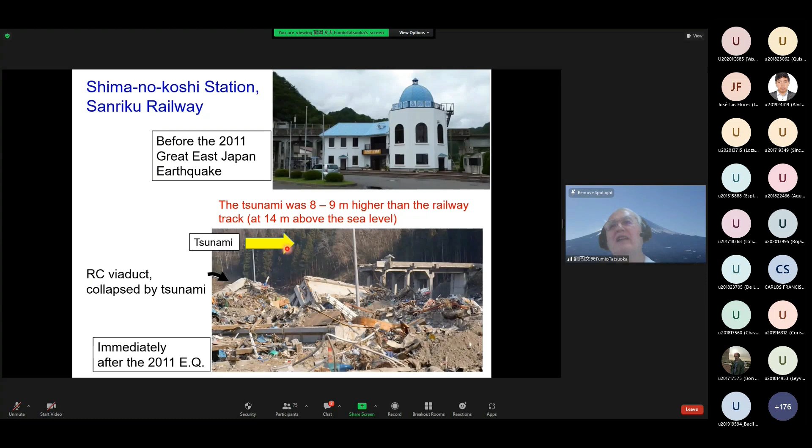This was reconstructed to a GRS embankment. This was expected to function as a tsunami barrier.

We have many collapses of cantilever type conventional retaining walls by scouring at the bottom, then overturning failure by facing, quickly followed by collapse of the embankment. On the other hand, a GRS retaining wall with full height facing shows much better performance. Overturning failure of full height facing by scouring is difficult to take place, so the embankment can survive, keeping the function of the road and railway.

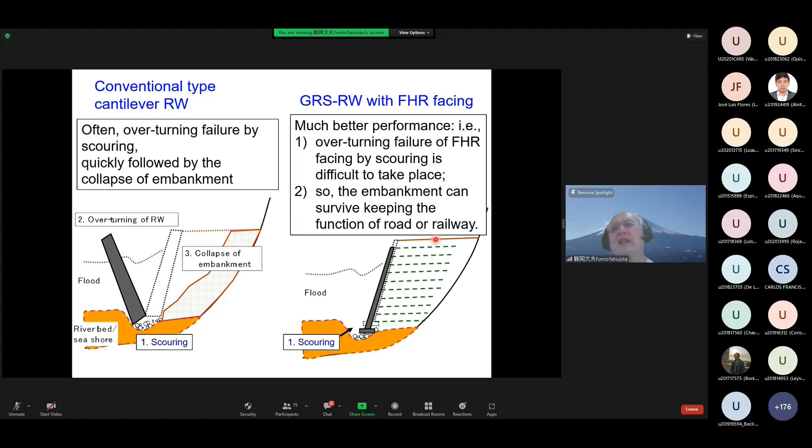This is a failure during Typhoon 2007. This was the collapse of the gravity type seawall for a length of 1.5 kilometers by ocean wave during storm typhoon. This is a cross section before the collapse, and this is after restoration to a GRS retaining wall.

This is before the construction of full height facing. Here is the casting in place of concrete for full height facing. This is the completed one, facing the Pacific Ocean.

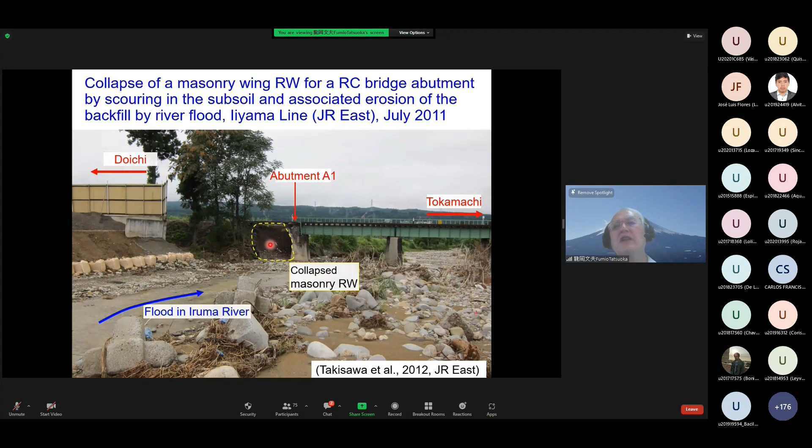This is the collapse of a bridge abutment by flood. There was a flood, and this wing wall, a masonry wing wall, collapsed by scouring like this. There are a number of similar collapses by floods in Japan. This was restored to GRS retaining walls like this.

Importantly, only 10 days was required to reopen the service. This is much smaller than the period required to construct a conventional cantilever retaining wall. The construction of full height facing occurred after the opening of service.

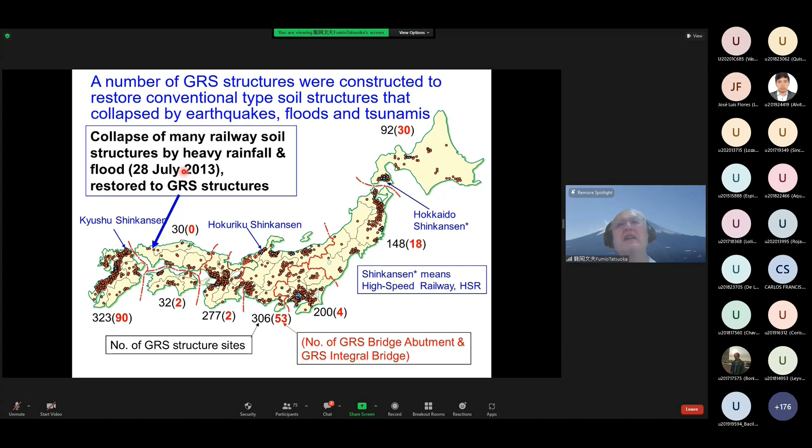This was reconstructed as a GRS retaining wall and a geo-reinforced slope. This is before the construction of full height facing. This is the completed GRS structure with full height facing, which is very effective to prevent failure of the wall by scouring.

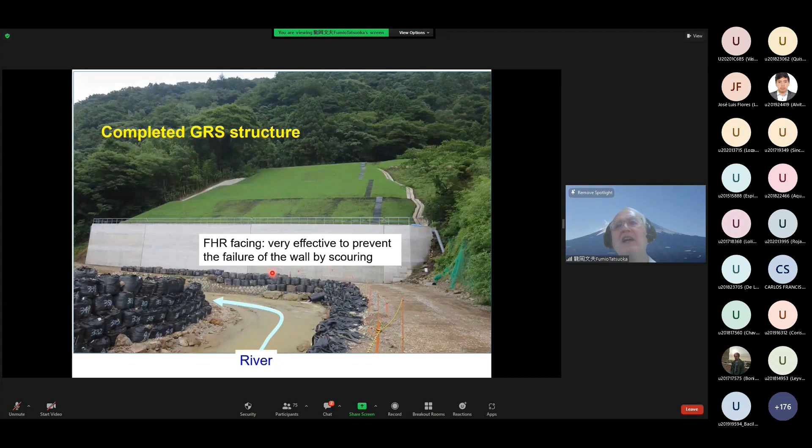So a great number of conventional type embankments, retaining walls, and bridges collapsed by recent severe earthquakes, heavy rainfalls, strong floods, high ocean storm waves, and tsunami in Japan. Many of them were restored to GRS structures with full height facing because of fast restoration and good constructability, even at remote places.

Second, high stability against natural disasters, even when constructed on steep slopes, and low cost for construction and long-term maintenance. So, concluding remarks.

First, a number of GRS retaining walls with full height facing, GRS bridge abutments, GRS bridges, etc., have been constructed as important permanent structures for a total wall length of more than 200 kilometers, many of them for high-speed railways, Shinkansen. This accomplishment is due to their high cost effectiveness, high performance during long-term service and against severe earthquakes, heavy rainfalls, strong floods, etc., and low cost for construction and long-term maintenance.

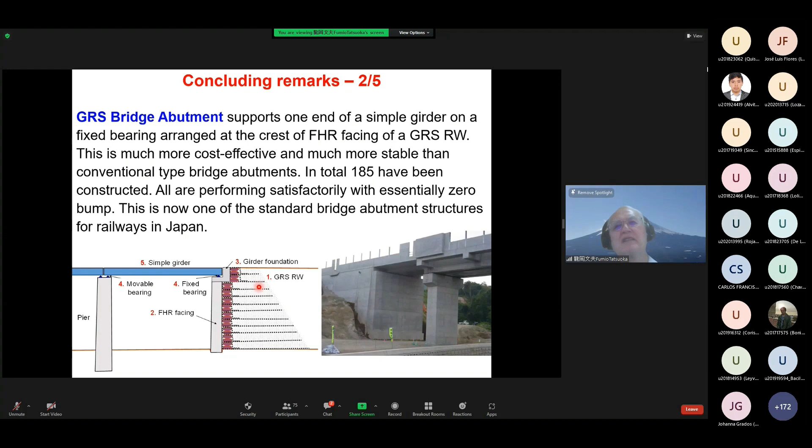GRS integral bridge consists of a continuous girder, both ends of which are structurally integrated to the crest of a full height facing of a pair of GRS retaining walls, without using girder bearings. This is much more cost-effective and much more stable than a conventional simple girder bridge. In total, 14 have been constructed.

GRS integral bridge is now one of the standard bridge structures for railways in Japan. Many of the conventional type embankments, retaining walls, and bridges that collapsed due to recent severe earthquakes, heavy rainfalls, strong floods, high ocean storm waves, and tsunami were restored as GRS structures having full height facing.

The following three breakthroughs were necessary to develop these GRS structures. First is the use of full height facing, for changing from low earth pressure to high earth pressure on the facing, and from the facing as a secondary non-structural component to the facing as a primary structural component. Second, staged construction, for a change in construction process from facing before the backfill to facing after the backfill.